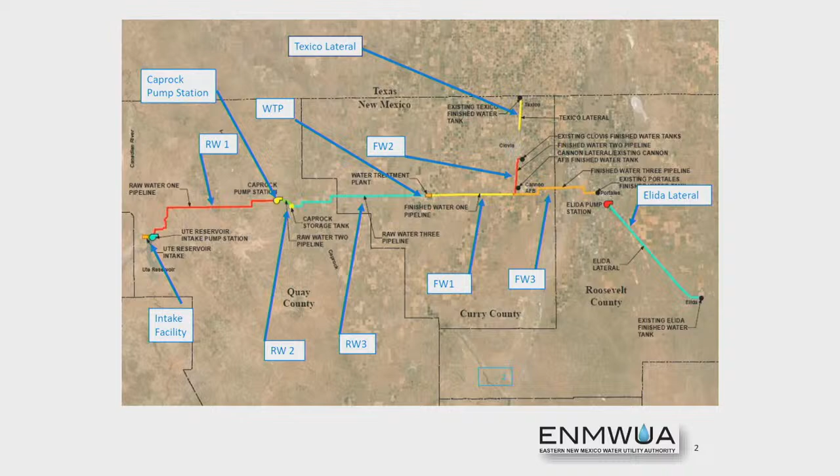So right now, this slide here kind of demonstrates the activity that's occurring right now as we speak, and we're basically working on every aspect of the project in one form or fashion. We're designing some pipeline and facilities such as pump stations, water treatment plant. We're also constructing pipeline in different parts of the project.

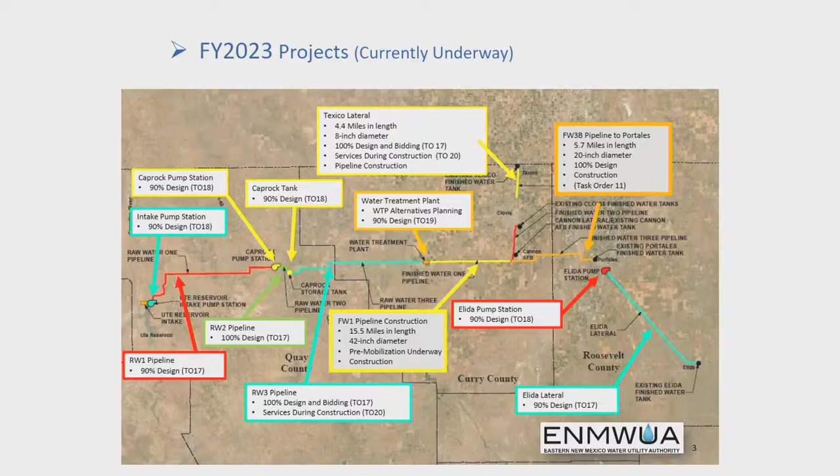So just a little more in detail, I can show you some of the projects that we're doing in real time. Finished Water 3, which is the pipeline connecting from northwest of Cannon Air Force Base to Portales, is under construction. And that's, as you can see, a little over 17 miles of 20-inch PVC water transmission pipeline. The next project is Finished Water 1, which is connecting to the north end of what we call Finished Water 2, the pipeline that has already been constructed connecting the community of Clovis and Cannon Air Force Base.

Finished Water 1 is 15.5 miles directly north on Curry Road R, and that is currently under construction. We're just now gearing up in construction, doing some fencing and clearing and grubbing. Pipe is to be delivered around the end of July, August timeframe.

And then the project after that is Raw Water 3, which is just north of the water treatment plant location, and Raw Water 3 takes us all the way to the edge of the Caprock. So we're looking at about 26 miles there of 42-inch diameter pipeline. That phase is just about almost 100% complete with design. We're currently acquiring easements along that phase, and we hope to be able to go out to bid by late summer with this project.

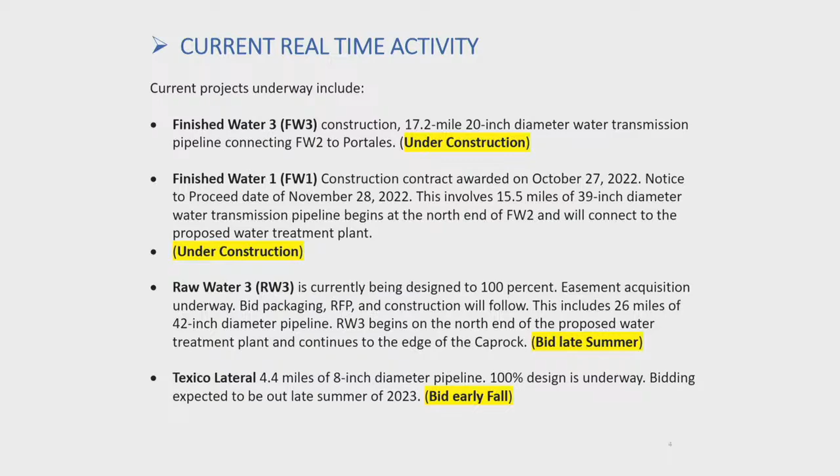So we were able to work with EPCOR and the city of Clovis in connecting at the airport location there, which greatly reduced the length of our original pipeline. Now we're looking at about 4.4 miles of that, and we hope to be able to go out to bid early fall with that project.

The next project here is Raw Water 2, which is a 3-mile section of the area of the Caprock. You can either see it at the bottom going up, or you can see it at the top going down. But anyway, we're currently working on that and looking to see what the best alternative is on how we will get to the top of that Caprock.

Raw Water 1 is the next one on the list, and that is the last phase of transmission pipeline that will connect to the reservoir, and that will be at the base of the Caprock and all the way to the reservoir. That's about a 28-mile pipeline and 42-inch diameter. Currently working with geotech work there, geophysics, working on 90% design, and easement acquisition has begun. So we're making good progress with that also.

And then the next one is the Elida Lateral and Pump Station, which we have another team working on design on that project, and about to kick off the easement acquisition. The Elida Lateral and the Texico Lateral, because the diameters are such small pipe, we'll be putting this pipeline in right-of-way, state right-of-way, for much of it. There are some private easements that we have to purchase and acquire, mostly when we're crossing from one side of the highway to the other.

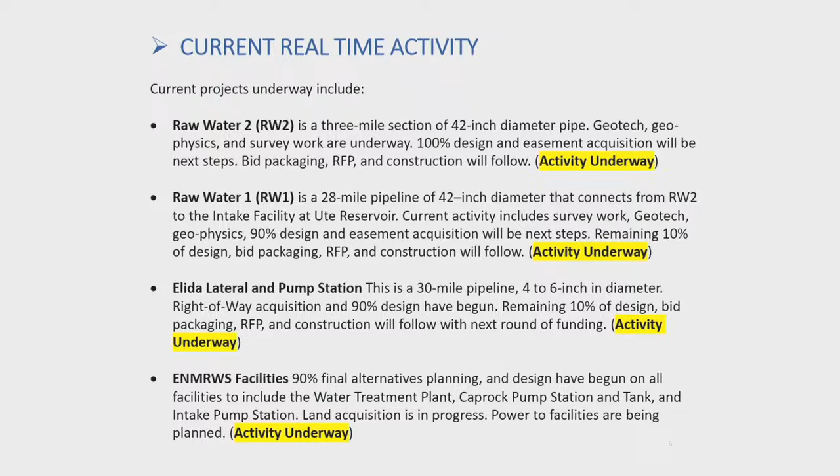And then the last bullet point on this page here are the Eastern New Mexico Rural Water System facilities, which are the water treatment plant, the Caprock pump station and tank, and the intake pump station. All of that is underway and making good progress with that.

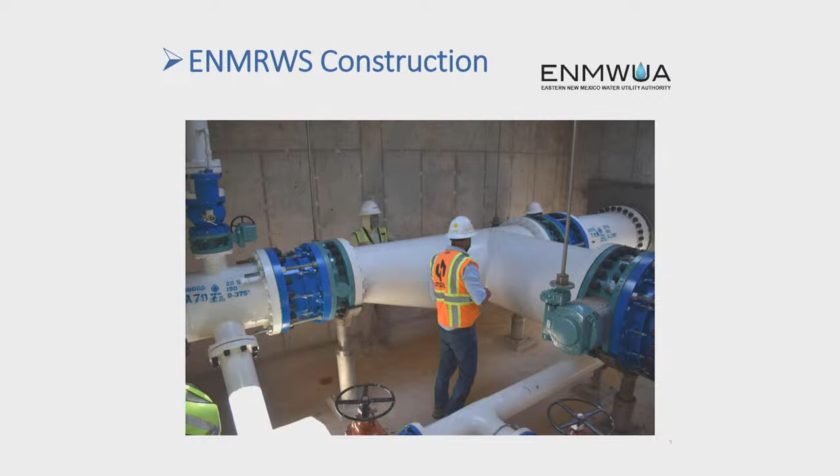Just a photo there of a vault. This is a vault on Finished Water 2, the pipeline to Clovis, at one of the Clovis vault locations, just so you get an idea of what that looks like. All of this is buried underground. This is what it looks like up above. We have, in some cases, vent pipes that come out of the ground, and then we have hatches where the operators can go down and inspect and maintain the valves and so forth.

Is there water flowing through here? What's that? Is there water flowing through here? There is water in the pipelines, but water is not flowing. When we complete a phase of a project, the contractor is required to do a hydrostatic test, to build up the pressure to make sure there aren't any leaks or any problems with the pipeline. So once that occurs, the water gets treated, and we allow the water to stay in the pipeline.

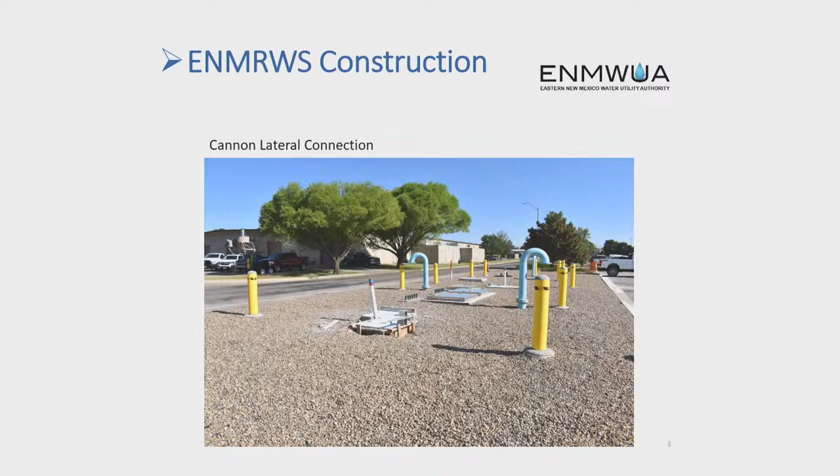For example, the larger diameter pipe is steel pipe, but it's coated on the inside with concrete or cement, and that cement has to be wet in order for it to be durable and long-lasting. So as the phases of construction are completed, the pipes get filled and hydrostatic tested. And then we do have a small team of operators and maintainers that go out and inspect the pipe regularly and turn valves just to exercise them, to make sure that they don't freeze up on us when the time comes that we need to use them.

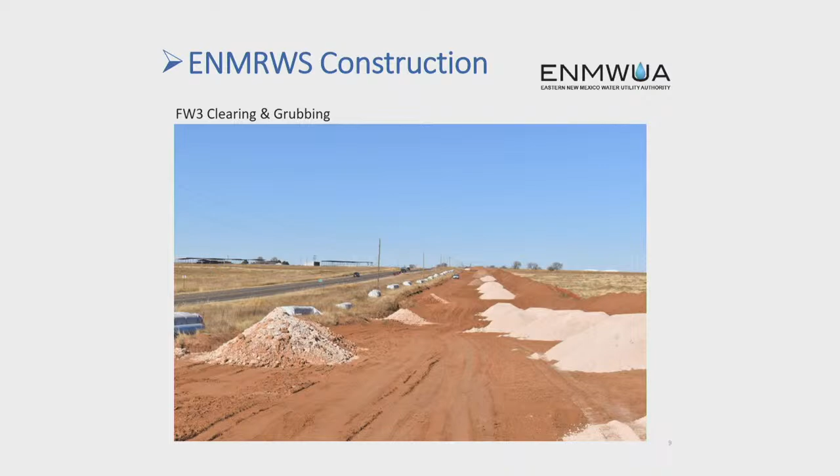This is a photo of some clearing and grubbing along the pipeline route to Portales. What we normally do is once we give notice to proceed to the contractor, they come in and survey the easement area, then they build a construction fence along the edge of the easement, and then, where we can, we preserve 18 inches of topsoil. We request that the contractor puts the topsoil to one side and the spoils to the other, so that topsoil is preserved and kept clean. Once everything is constructed, that top 18 inches of topsoil is put back and then reseeded.

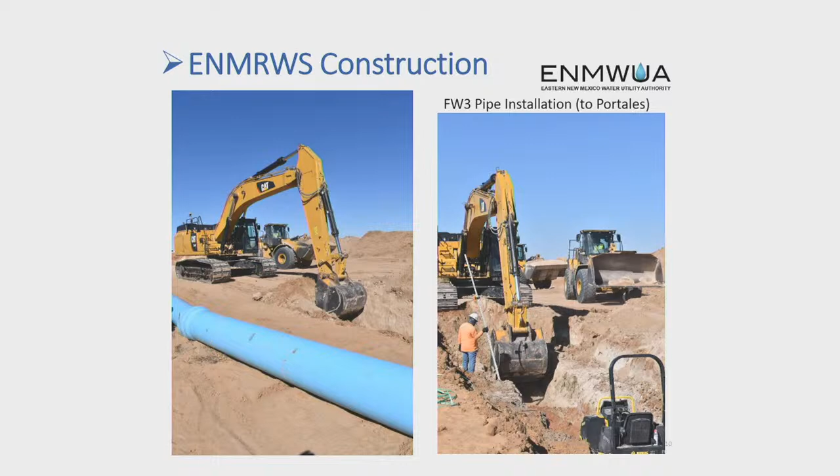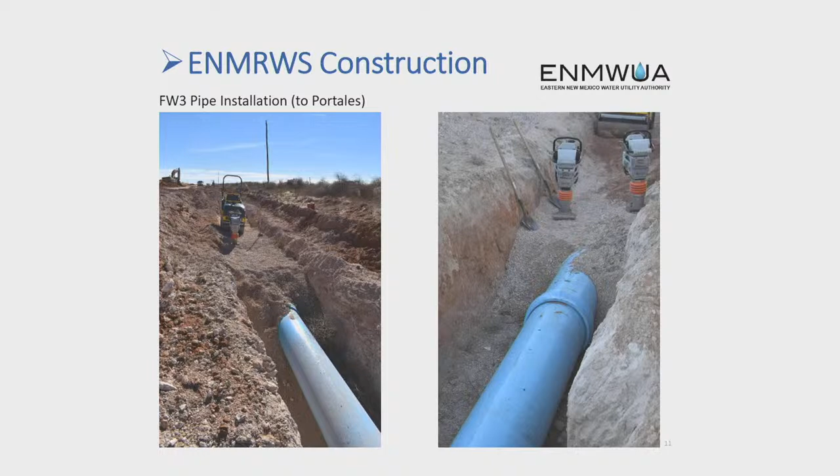A few examples of our construction headed to Portales. As you can see, when that pipe is set, we add some bedding underneath and around the pipe in order to protect it. In some cases, it's a granular bedding, and in some cases, it's a controlled low-strength material. Another photo, an example of a finished vault. This is a vault to Portales.

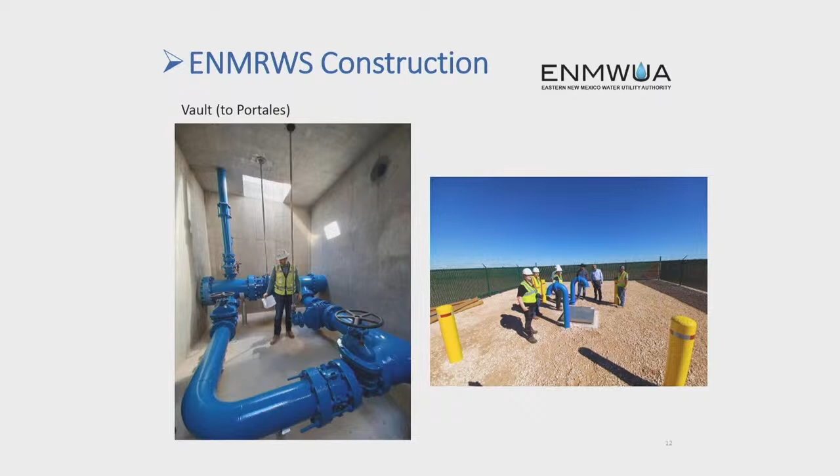Just want to highlight a little bit about the funding that is occurring during our processes now. As you may know or do know, back in 2021, our project was one of 5 rural water projects that were listed on the Infrastructure Investment and Jobs Act funding. With that, $1 billion was set aside for those 5 projects, of which the Eastern New Mexico Rural Water System is receiving a bulk of that funding.

We had some great success both in 2022 and 2023 with the New Mexico legislative sessions, very supportive of the project and meeting the state's match of 15% to this federal funding. Just to give you an example, in fiscal year 22, we received $177.4 million in federal funds through the Infrastructure Investment and Jobs Act funding, and a little bit of additional funding through our congressional delegation.

We also, that same year, which was last year, received $30 million in capital outlay. And then, of course, the Eastern New Mexico Water Utility Authority match to that at 10% was $20,740,000. So a total of $228,140,000 for fiscal year 22. Really gave the authority a boost in ramping up all of our projects, as you can see.

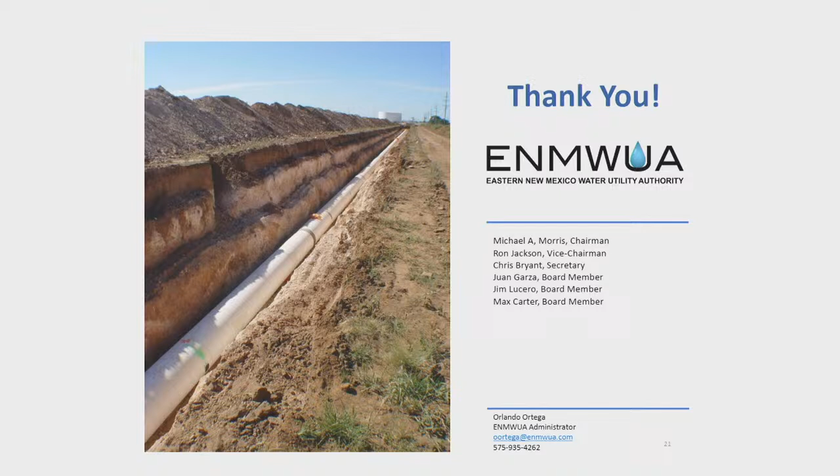And that's the presentation. Thank you very much for allowing us to be here today. Thank you, Mr. Ortega, appreciate it. Any questions? Yes, Commissioner?

With the easements that you have for your pipeline... Turn your speaker on in the back. With the easements that you have with the property owners, what kind of compensation is in consideration for damage to growing crops when you go in, and also for the restriction imposed by the fencing that keeps them from being able to use the land during construction?

Member Martin, yes, we do everything that we can. First and foremost is utmost respect to the land, to the property, and to the property owners that we work with. We have certain federal and state guidelines that we have to adhere to in easement acquisition. We follow those guidelines. We do have appraisals done on the properties, and the authority tries not to get involved with that too much. We kind of separate ourselves from the appraisal process.

The appraiser goes out and makes arrangements to meet with property owners so they can get a good feel of their property from the owner's perspective. Once the appraisal is complete, that appraisal goes out to another appraisal service, and they do an independent review to make sure that it is accurate and fair. Once that occurs, it comes back to the hands of the authority, and we prepare an offer to the property owner, and that's how that process works.